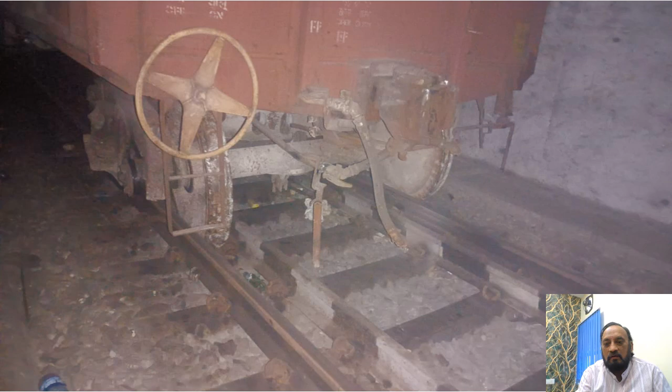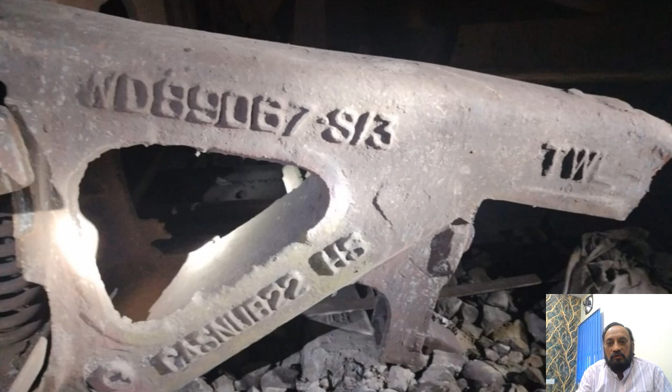This is the picture of the wagon which derailed, and this is in derailed condition with the trolley, and this is the picture of the side frame which had a broken lug, and this end is broken, and only this one wagon had derailed in the entire train, and the drag length is reported to be something around 4750 or so meters, meaning nearly 5 kilometers.

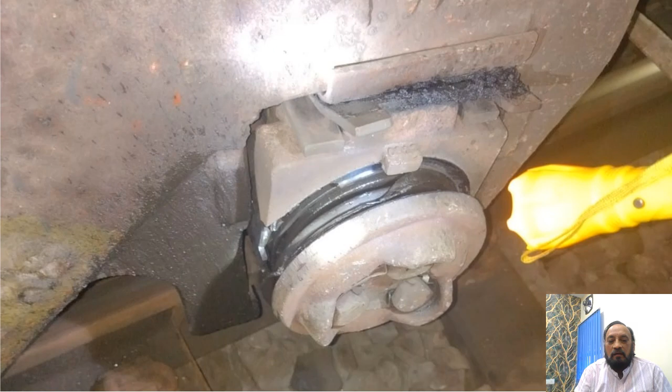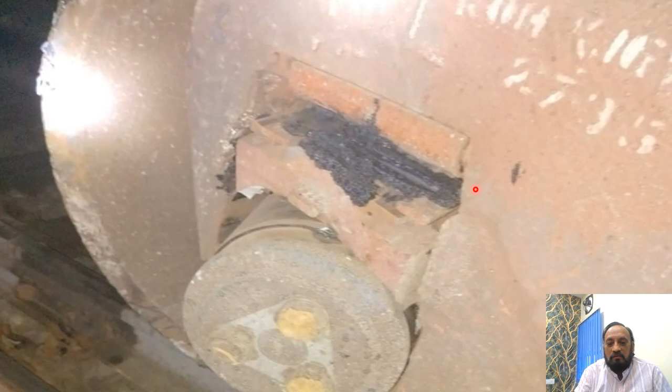These are the elastomeric pads which are perished, pulverized or perished, and this is another adapter also twisted, and the EM pad once again no more.

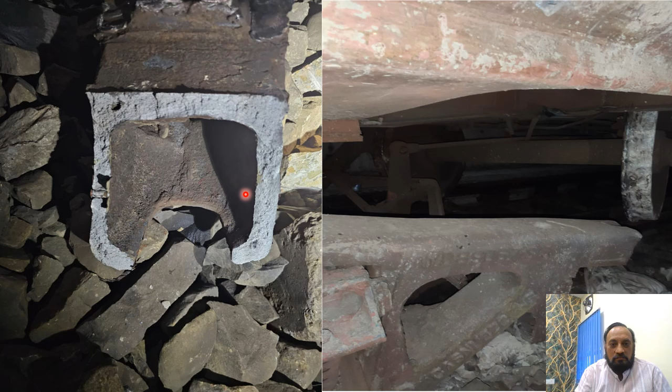Yeah, this is the view of the side frame broken, and we can see here these are just very fine surfaces. This is also fine surfaces, meaning internal flaws were there. These are the holes, again hole, again hole, and if we minutely see, these surfaces also give an impression of fine surfaces which had been, just like we can say, battering or pre-breakage indications, but normally these surfaces nobody checks.

I don't know what is the sequence or the periodicity of checking all these, whether these side frames are subjected to ultrasonic tests or not. But these are all old pipings or blowholes, we can say, in the cast. And this is whatever was observed, and this is the other part, this side. This is the broken part. And these are the different views of this wagon.

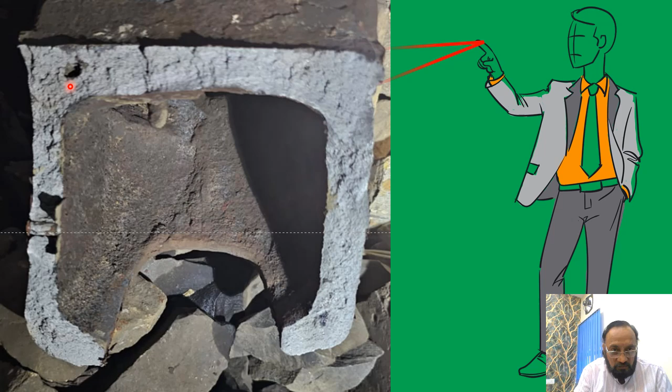Well, this is another view, a closer look at the defects we had found and seen in the previous slide. These are the holes, and we can see these are cast defects maybe. This is the position of the wagon after derailment, and this packing was inserted, and this was derailed. Now this is stabled for further measurements and investigation.

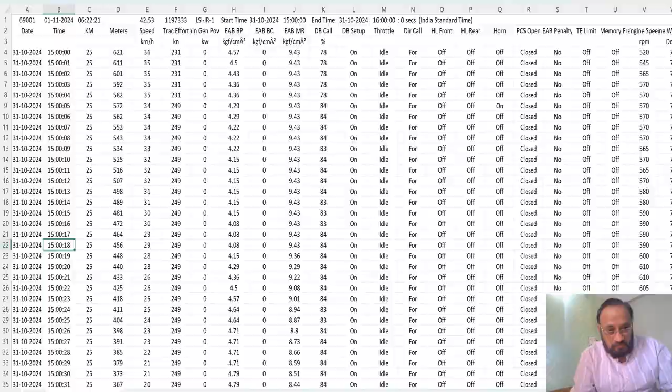As I said, we extract the most needed ones for our calculation purposes. So this I have copied out. This is the time, this is the speed, this is the brake pressure, then this is the tractive effort. THL means throttle position, then this is kilometer, and this is the distance.

Okay, so why I need this is just to see that from the total drag length where the train came to a halt, from that location I'll go that much of distance back in the rear with the timings, right? So in this case the total drag was 4750, so I could get up to 53, so 2-3 meters hardly matters. So this time I have gone back at what time it could have occurred. So this comes out to somewhere around here, 33 or so.

So this distance we calculate like that way, and from there we see these parameters. What had happened, the throttle position was increasing, this was in increasing position. Okay, so then we also come to know about the section details. So from where the train stopped, 902 is the distance. Prior to that, the grade was falling up to 1800 meters.

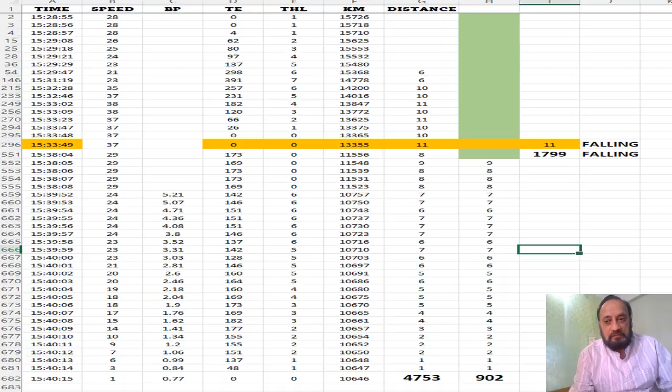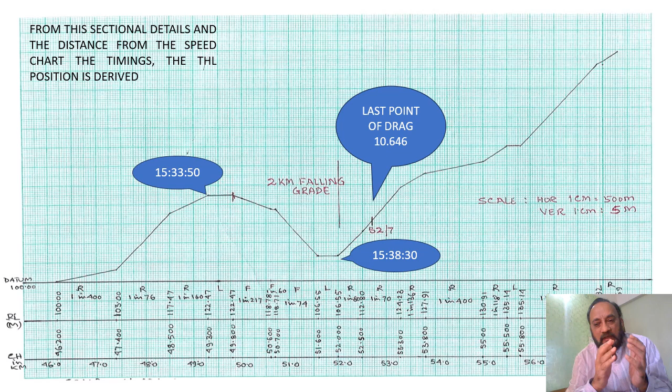And from this graph and the previous one, we can know the behavior, the working, the running of the train per second. So this is how we can make use of this data. And this is just what I wanted to share with all my viewers, that we can use it in the most effective way, provided we get the proper data and sectional details. And it's very easy and very technical, very analytical, for the purpose of investigation of derailments.

And when it is also being hauled from the front by two engines and being pushed by a banking engine, there are multiple forces which can result in derailment. And if there is a buffer height difference, say this is low and this is high, and this gets a push like this, it can lift and derail. So I'll come to buffer later on, but I just wanted to show you how we can plot various graphs out of the data available and see for ourselves.

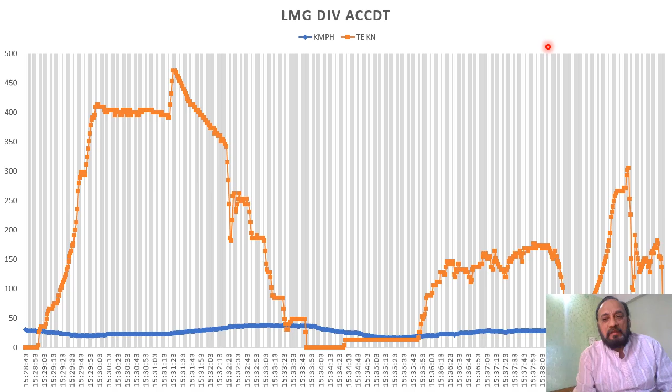This is another one. This is only speed and tractive effort. So again, we can see the same thing whatever we had seen in the previous graph, how the tractive effort was increasing, decreasing, increasing and decreasing. So it's just moving like this way, sinusoidal way. Frequent up down, frequent up down, frequent up down.

So till now we had been discussing the run of the locomotive, and now we'll begin with the wagon measurement, which was affected when there was only a single wagon which had derailed. So these are the initial details of the wagons, number of the wagon, and these details.

My first and foremost emphasis is always on measuring the buffer height. This gives me the pulse of the suspension system. So here, initially when the wagon was derailed, it was emptied on the side which trolley had derailed. So the derailed trolley side was emptied, and then in empty condition the buffer height was 1035.

So one can imagine if it is fully loaded, certainly it will go below 1030, and 1030 is the minimum required in loaded condition. So from here my direct suspicion goes to poor suspension system. So this is what I could reveal from here, and further this was strengthened by my reading of these two parameters. So 225 and 235, certainly the grouping is improper, and I will show you how I came to that.

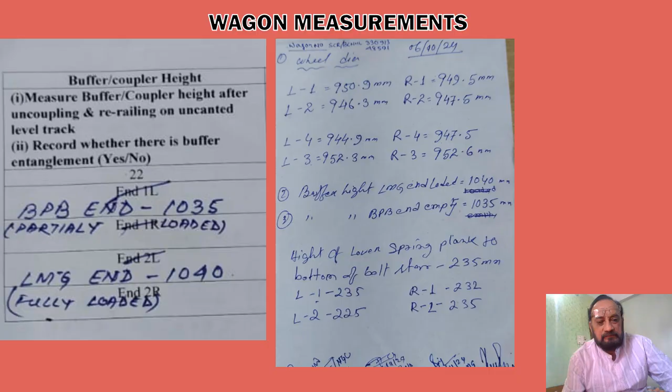Again, there was a difference of wheel diameter. Now it is a debatable parameter, because mechanical says they don't have any limit in service. So there can be any amount of wheel diameter difference, it doesn't matter. Great, what a logic. But anyway, I must emphasize and I must inform, there is in-service limit for the locomotive. For diesel it is 1.6 mm on the same axle, that is the last limit. For electric loco it is 2.5.

How come the wagons do not have any wheel diameter difference in service tolerance? This is somewhat very funny thing what they say, but still we have the difference. Whatever is recorded, it is being displayed here. So this trolley which derailed had a problem with the wheel diameter as well.

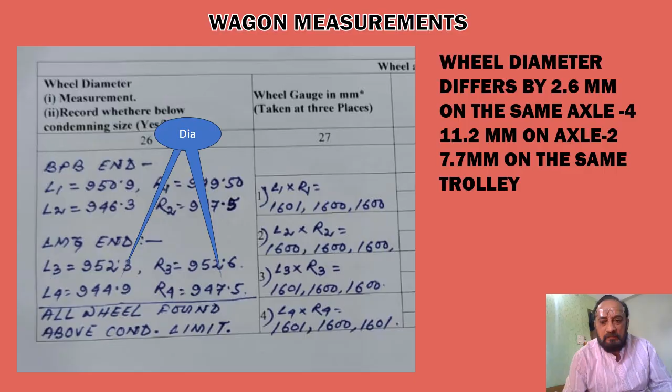Now next portion comes about this thing, the lateral clearances. So we can see from the record that this is 55, 64, 61, 60. Now these are to be added, these are not to be singly given over here, and the maximum limit here is 45, and for the column 43 its maximum limit is 26 millimeter, and while for this one it's 20 millimeter.

So we can see all the clearances are abruptly varying and are beyond the maximum permissible limits. 60, 45, 61, 45, 64, 45, 55, 45. We can oversee here also. This is the lateral clearance between the side frame and the axle box adapter. The maximum is 26 and we are having almost the double of it. It's really fantastic. Never seen such huge clearances on a wagon.

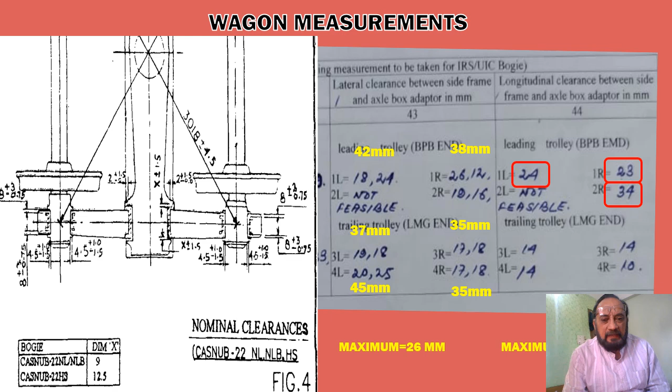And one thing more I would like to say, why we added these ones was because these two are added. This plus this makes a total clearance. This is between the side frame and the bolster. This is bolster, this is side frame. Similarly, here also for the lateral clearance these two total are taken, so these are added. So here we have added this 18 plus 24 like this way. So that's why, when we add it, the clearances are abruptly high.

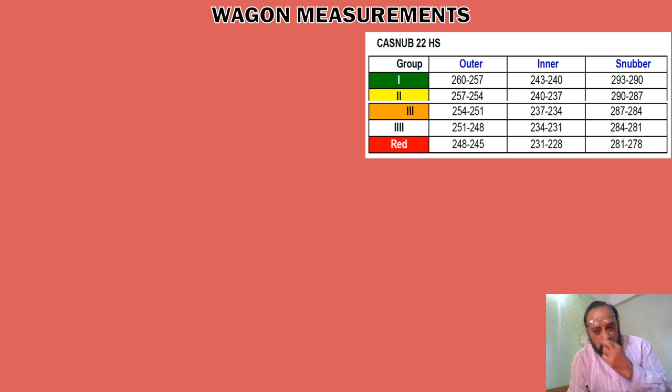Now comes the turn of the suspension system, and a few seconds back I had told how my suspicion went from buffer height to a defective suspension system. It is now illustrated from this sheet. These are the standard heights in the range of 3 millimeters. So groups 1, 2, 3, 4 are having a range of only 3 millimeters. So in a wagon, if it is yellow band, then all springs will be of the yellow band, and these are the ranges given.

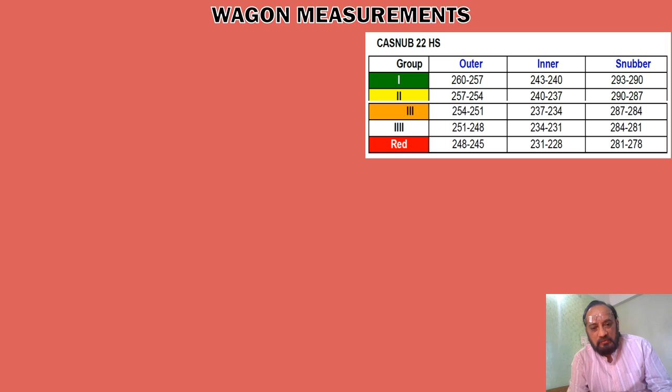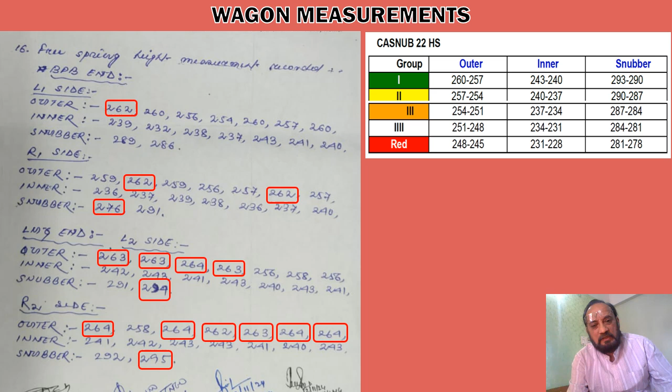Maximum is 260, minimum is 245 for the outer, and then we have 243, 228 for the inner, 293 and 278 for the snubber springs. Now let's see what's the beauty of this measurement. Yeah, on white paper with blue ink and red encircling certainly increases the beauty of the data sheet. All blue circles, red circles indicate those which are out of the tolerance. So springs beyond the permissible range have been used.

And we see the permitted range is 3 millimeters of height difference, while we have 8 millimeters of height difference in the outer spring. This is 262 and 254, which makes a difference of 8 millimeters, while 243 and 232 make a difference of 11 millimeters in the inner springs. Again, this is at condemnation limit. Less than 278, it's condemned. Further, we have higher range springs. Here it is 294, here it is 295.

One thing very importantly today I am going to share with you here. Whenever we measure the springs, there is always a very spicy reply from the mechanical branch that after the derailment the springs get damaged or this or that. Well, one can understand it can compress down permanently. How can it increase in height? How can it increase? The results are before you. You are at liberty to decide for yourself whether what they say is correct or not. This is after derailment.

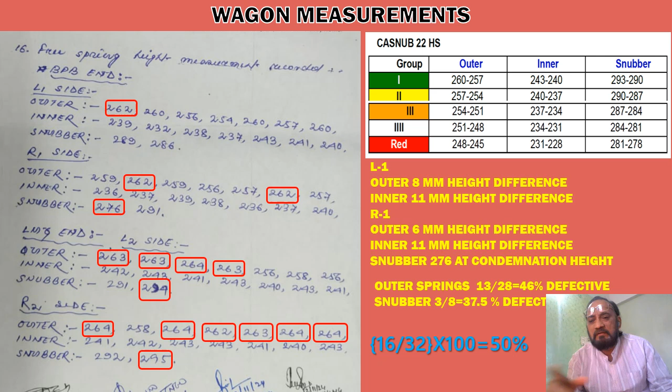The inquiry committee has the liberty to take any additional measurements, vide para 6 and 7 of the Railway Board's letter.

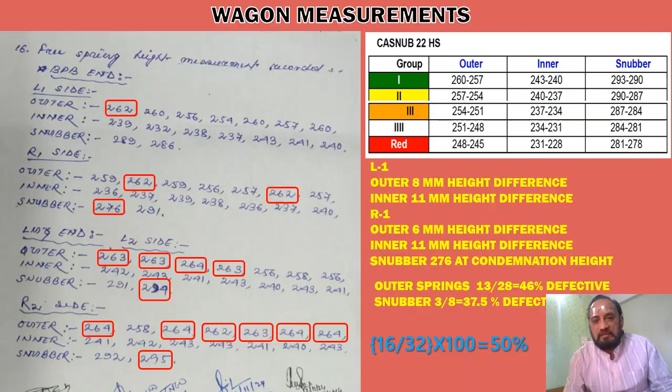Well, viewers, knowledge is just like this ocean, and learning has no end. And also, learning does not have any age. At any age, one can start learning. The only thing required is the appetite to learn.

So, in this video about this case study, if I sum up, there was a drag of 5 kilometers, which the loco pilots could not make out as to what was going wrong with the train composition, and they failed to recognize it until there was a final 5 kilometers of track damage. The train stopped. If we go to the wagon, wheel axle, wheel diameter is differing. We come to the suspension, 50% springs are out of the tolerance.

If we talk about the clearances of the trolley, all are abruptly higher than the maximum permissible. Somewhere it is 1.5 times. So how do we run the train? How do we certify that this is fit to run? What is the intermediate check? These are the points which need to be pondered upon.